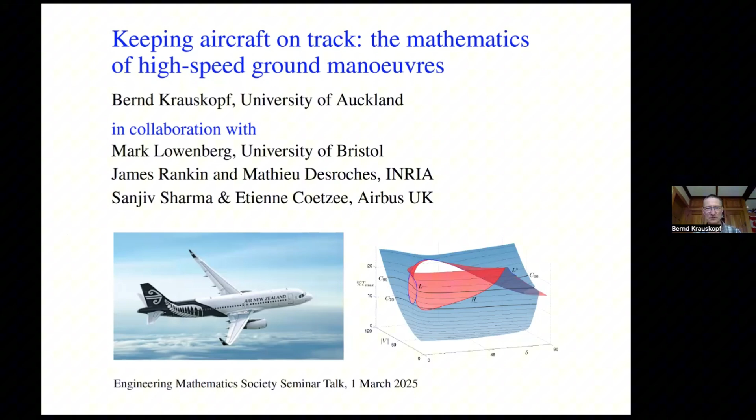You can see a picture of an aircraft at the bottom left, and this is probably how you see aircraft, as flying machines, and that's of course correct. But aircraft also need to maneuver on the ground. And this is the motivation for today's talk.

In fact, in the air, aircraft are all pretty much flying at the same speed—I'm talking about commercial jetliners. Really the money that you can earn is by quick turnaround on the ground. You may have heard of low-cost carriers, and the whole idea is to have the aircraft on the ground as little as possible and just be flying all the time. So that means you have to safely and comfortably for the passengers be able to drive the aircraft as a ground vehicle.

That is driven by, as I mentioned, turnaround time. But the other thing is also automation. You may be interested to hear that the only time you can be sure the pilot is actually actively operating your aircraft is when you are on the ground, because most actual flight operations have been automated. But driving an aircraft on the ground is a lot harder in some sense.

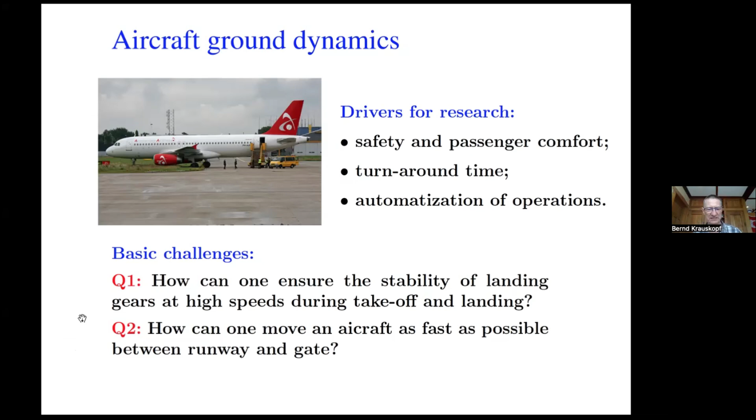But the other question is, how can one move the aircraft as fast as possible between runway and gate? And of course, always subject to safety conditions and passenger comfort and so forth. So this is the second question we'll be talking about today.

Now, to start off with, the landing gear of an aircraft is actually a very nonlinear system. So handling aircraft on the ground is very nonlinear. What do I mean by nonlinear? I mean that if you change some parameter, the reaction of the system is not merely linear—it could be stronger or weaker or whatever. And the reason for this is that you have so-called oleos; these are the shock dampers. They are highly nonlinear, and of course you have damping, compression, friction, saturation.

You cannot damp any load. Then the tires themselves are also really very nonlinear things. Tire dynamics is a complicated field on its own.

And then you have aerodynamics, and you may know this famous formula, 1/2 rho v squared. So the aerodynamics goes up with the square of the velocity. When you go very slowly, that doesn't really play a role. But if you have just landed, there's actually considerable load because of the tail plane of the aircraft. So if you want to turn and you have a tail plane, that tail plane will actively basically object to the aircraft being turned if you're very fast.

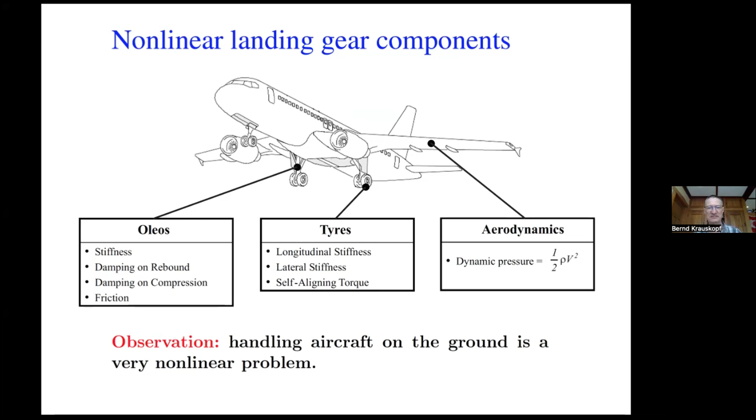So this is a very nonlinear problem, and that's why we approach it with nonlinear methods. So let's have a look.

The question is, how can we move an airplane as fast as possible between runway and gate? I'm concentrating today on high-speed turning maneuvers. You land at the runway, and probably you've all flown, and then the aircraft has to turn off, and there are different kinds of turns, different angles of turning. It could be up to 90 degrees or even 135 degrees, and you want to get off the runway as quickly as possible at still reasonably large speeds. First of all, to evacuate the runway to allow the next plane to use it. And secondly, because you want to use that speed that you already have to get to the gate as quickly as you can. So when we're talking about high-speed turning maneuvers, there's a number of specific questions we can ask.

When is a turn stable? That's obviously really important because when you come off, you don't want to miss an exit or go too fast. If you're driving cars, motorcycles, or other vehicles, you know that one shouldn't go too fast around corners. And what does that mean for an aircraft? Then the other interesting question is, how can a turn actually become unstable? So this is really the question, what are the stability boundaries of high-speed turning maneuvers?

This is, of course, an interesting question. From the applications point of view, you need to know where are the stability boundaries. I'll be showing you some, and we have some techniques to calculate these boundaries directly. And of course, the real fun part is what are the possible dynamics of the aircraft on the ground, including when the turn is no longer stable.

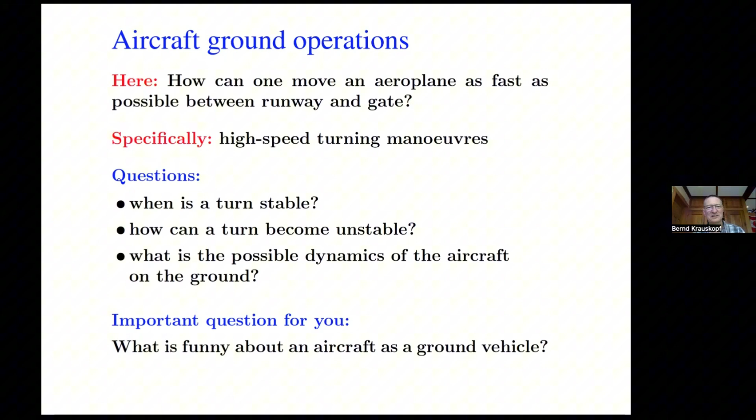What is funny about an aircraft as a ground vehicle? I'm not sure how practical it is over Zoom to have people ask questions or try to answer this question. But if you are brave, you can type in chat and tell me what's probably funny about an aircraft. And I have an aircraft right here. I hope you can see this aircraft. It actually says fun plane, and so this is already funny. This kind of plane looks slightly different from normal planes, but it has an important property. Is anybody brave enough to give me an attempt at answering this question, or you can also speak up on Zoom? Oh, there's a chat.

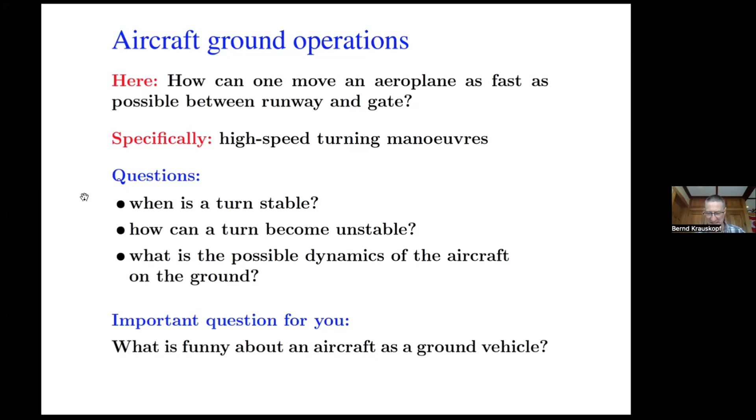Excellent, let's see: the wings. That's, of course, excellent. Yes, you wouldn't build a car with wings. Fuel efficient. No reverse gear. That's also very, very good. Anything else? No traction on the wheels. That's also excellent. Right, so aircraft are really not like cars. Aircraft are supposed to fly. Yes, they have very small wheels. Okay, this is fantastic, I like people getting engaged here. The key thing, though, that I would like to get to, nobody's yet come up with, and that's not a criticism at all, but let's see.

Okay, so actually aircraft, normal aircraft, the smaller types at least, they have a tricycle configuration, right? They have a nose landing gear and they have 2 gears under the wings. Of course, much bigger airplanes have even more wheels, and we studied that too, but the classical mid-sized passenger aircraft has 3 wheels. You probably had this kind of toy when you were younger, or maybe you're still driving around on a trike.

If you go around the corner, you have to be really careful because this could be very tipsy - if you go too fast, you will basically topple over. The key thing is that we have a tricycle configuration of the wheels, with steering only at the front. That's not so dissimilar from a car, but because of that tricycle configuration, you somehow feel that the whole thing is inherently less stable.

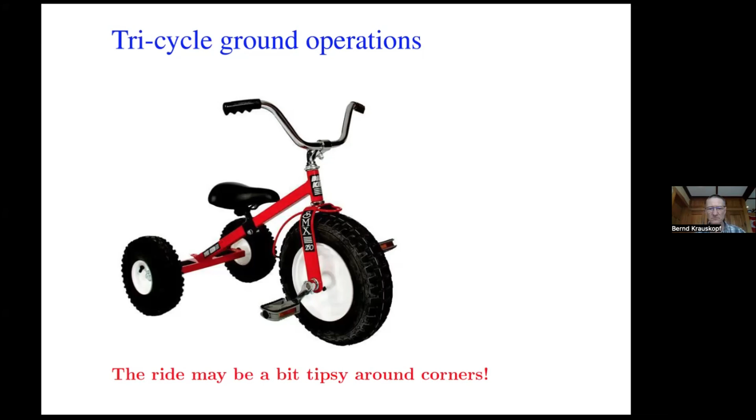Okay, so far so good. Now, how do you study this kind of a system? We work with Airbus, so they have industry-developed models. This particular model is done under SimMechanics, which you may have heard of - this is under MATLAB, and it's a way to have multi-body systems and so forth.

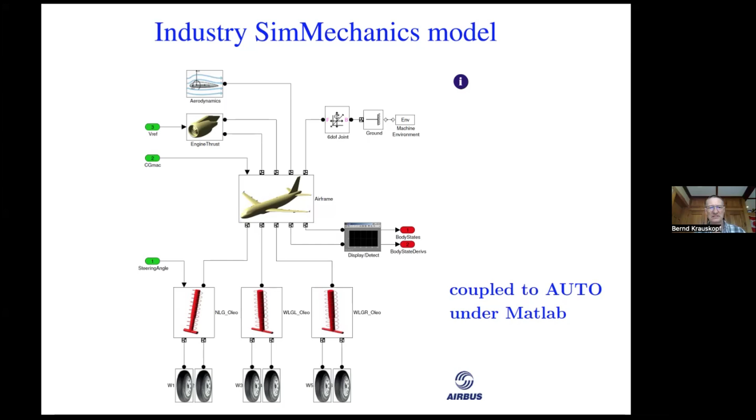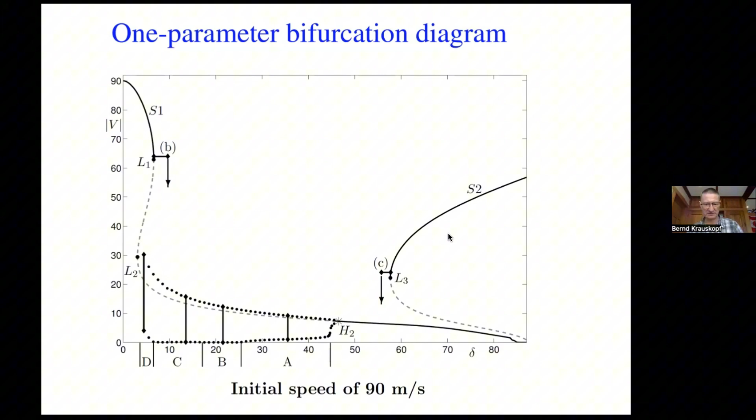This is a video of a landing of an A320 by JetBlue, about 12 years ago. If you look at this picture, I hope everybody can see it.

It turned out that the nose landing gear was stuck at 90 degrees. It's supposed to point in the direction of travel like the other wheels, but it was actually stuck at 90 degrees. So this plane flew around for a while because they noticed this, and they burned off some fuel.

The question is, what should we do? Should we land this plane? There's nothing you can do while this thing is in the air. The nose landing gear was stuck - it didn't retract, it was stuck in this position.

So then the pilot landed, and I'll show you what the landing actually looked like. So this is basically on this branch over here at 90 degrees. So you're not steering, right?

So you're basically using the nose landing gear as just a braking mechanism, if you like. So let's run this video. It's quite amazing.

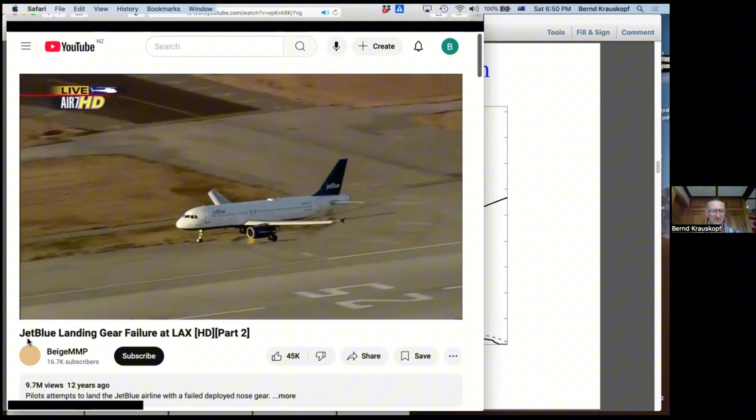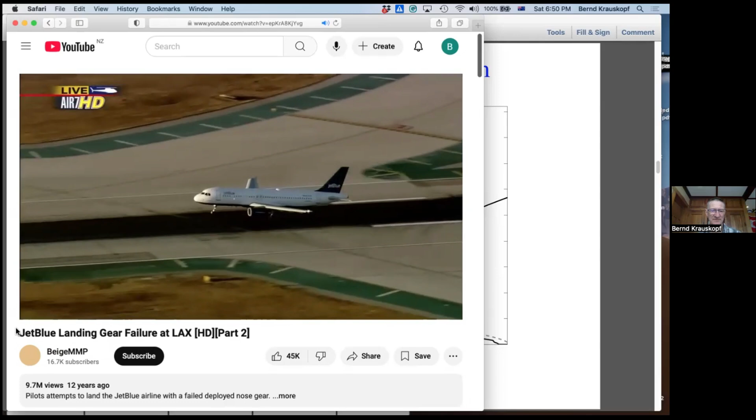So there's the touchdown, but the nose landing gear is still in the air. So they try to slow down, and there it's touching.

Okay, I hope everybody could see this. This is really quite amazing - this is basically landing with a stuck nose landing gear at 90 degrees. What I'm telling you here is, if the pilot would have had the opportunity to actually turn the landing gear a little bit out of the 90 degrees, he could have actually steered the aircraft a little bit.

Now, to understand what's going on, I have to ask whether anybody's ever skied or seen skiing or skating, because if you're on ice skates, say, you go like this, and if you brake, you actually turn your skates 90 degrees.

So this branch, which is really quite surprising, gets picked up by this aircraft model. And absolutely amazingly, there is actually an incident where this has happened. Okay, so now let me continue on.

And so I showed you two examples, right? I showed you this example for 70 meters per second. I showed you this example for 90 meters per second. So this is a one-parameter bifurcation diagram where we plot the total speed of the aircraft as a function of the steering angle.

As we follow the circular solutions that you're getting, some of them are unstable. In this case, a lot of them are unstable.

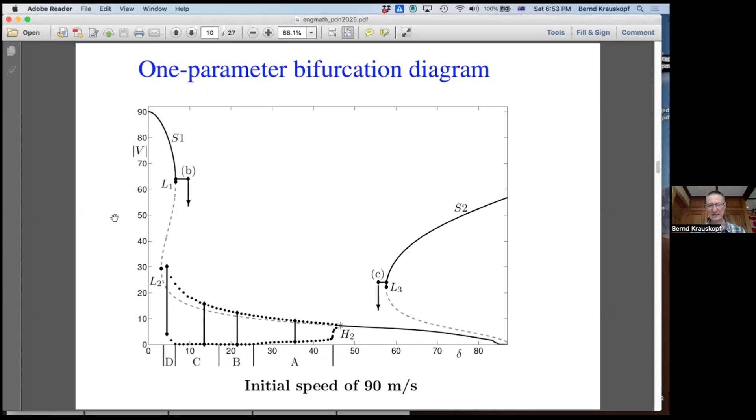Now you can do this for several different initial speeds of the aircraft, and then you get lots of curves and they sort of look different.

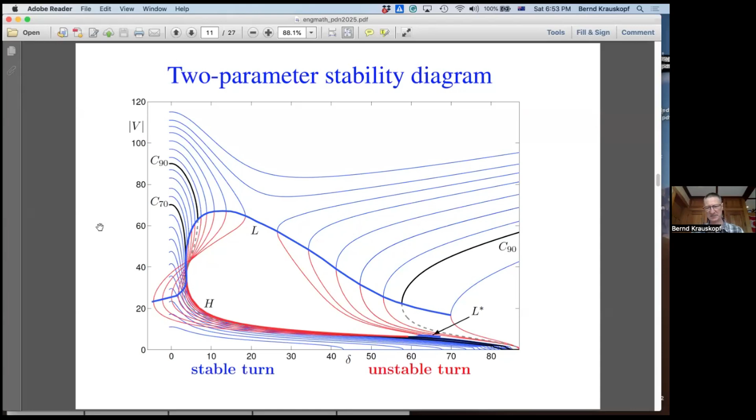And whenever the curve is red here, it's unstable, and whenever it's blue here, it's stable. And it's a bit hard to see what's going on, that's why it's very useful to make a three-dimensional surface out of it.

So both are unstable. The C70 just went through this little red region here where the turning angle is not stable. And the C90 is quite more spectacular.

And here over the side, you have this other branch. You have to be pretty fast in order to get this branch - if you're too slow, you don't have it. So what's the engineering relevance of this plot?

The plot, we can calculate these curves directly, generate the surface. And if you're an engineer or an aircraft designer, you definitely want to be below the red region.

So never go land at more than, say, 60 meters per second and start steering. And of course, for safety, the normal turnoff goes at even slower speeds.

So this is showing how the tools of following stable and unstable turning solutions - you do this in these different slices - you can get what we call a two-parameter bifurcation diagram. It now depends on...

...the turning angle as well as the initial velocity, and this can give you information on how you might design or operate an aircraft.

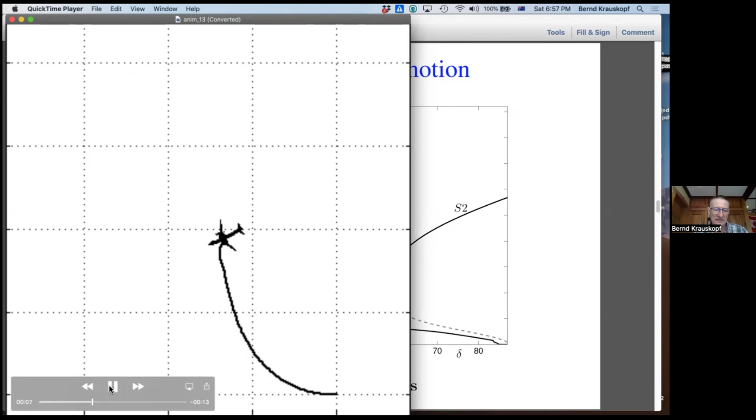So let's watch this one more time. You can see the aircraft turns around a full circle relative to this curve. See, so it's now turning to the right - spinning out of control. Then it keeps going and it goes faster, attempting this turn again. And that's it.

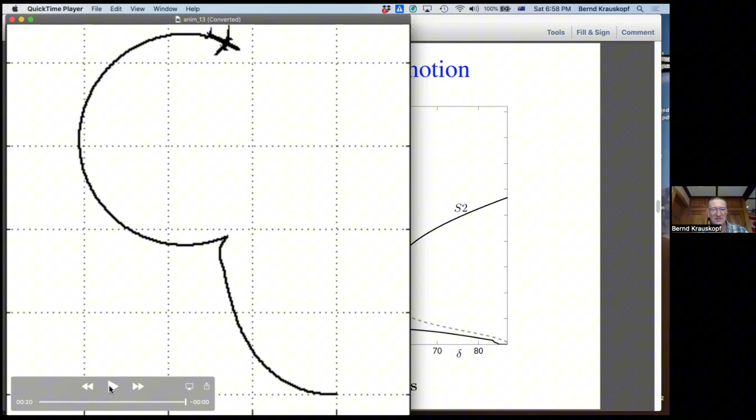So this is what it looks like when you're going around the corner too fast. It's a bit like on a car or motorcycle, more dangerous I suppose. But in a car, if you did this on ice, you'd spin out and also do some sort of a turn relative to the curve you're traveling in.

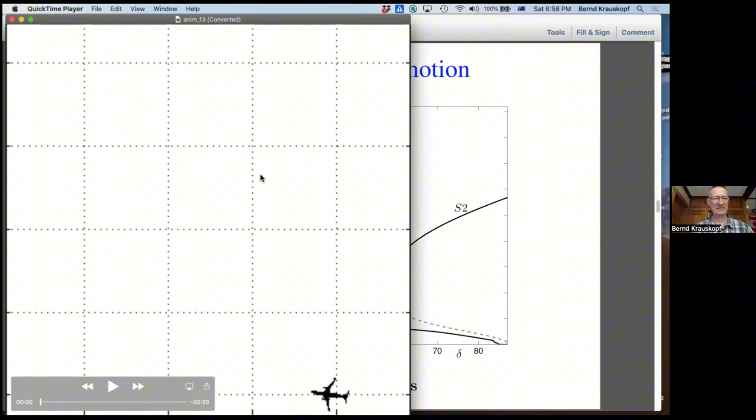Now we had an idea to apply this for practical purposes. Let me see if I can do this here. Okay, so our idea was to have the terminal building over here, and you can see what the idea is. The aircraft comes, and here we go - it parks perfectly at the gate.

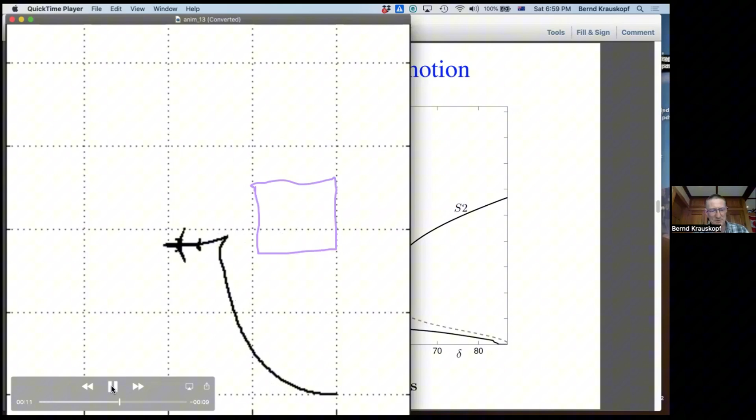So that would be sort of the Blues Brothers approach to parking an aircraft at the gate. I don't know if you've seen the movie Blues Brothers, but they have a funny way of parking their car by sliding it into a parking spot. Now the aircraft comes to a stop, everybody can get off, new passengers get in, and once loaded you just drive off again. It completely takes care of having these machines that push the aircraft forwards and backwards and all the rest of it.

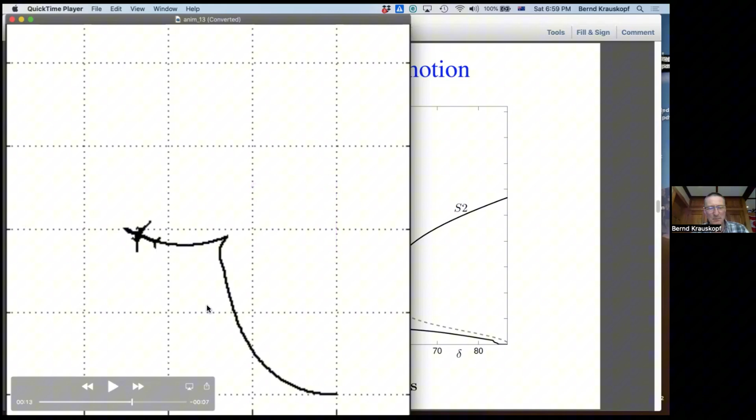You may have already an inkling that our sponsors were not too happy, for safety reasons, to actually operate an aircraft like this. But anyway, this is just a bit of a fun idea - you could in principle park an aircraft at the gate like this. Not to be recommended or tried at home.

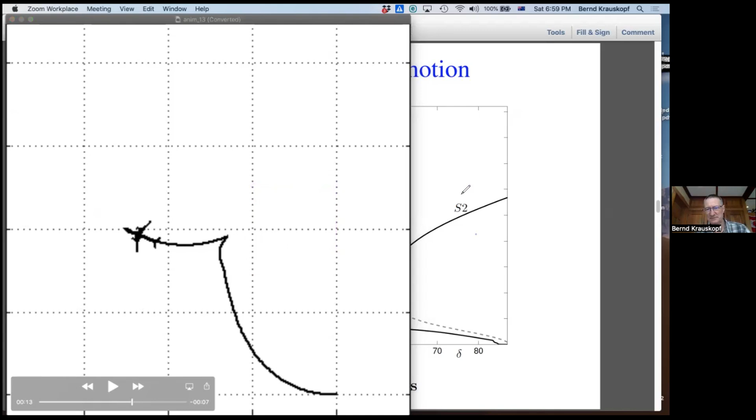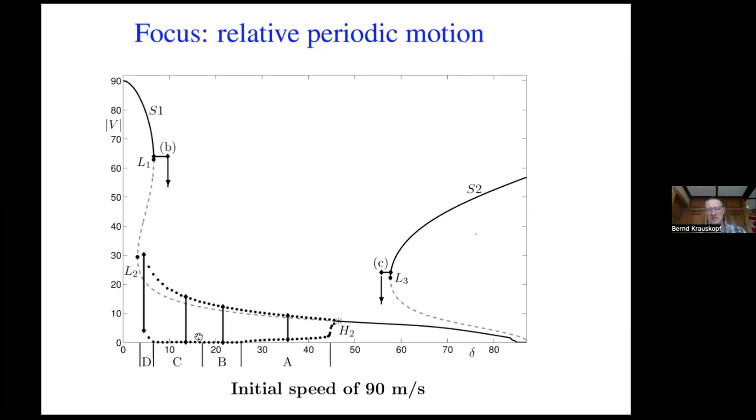All right, so that was fun, but actually we want to do some more serious stuff, and this is what we can do. We can now have a look. If you look at this picture, we have divided this up into several regions, A, B, C, and D, where you find different kinds of properties of this particular turn. So it doesn't always look exactly the same, and we can actually characterize this.

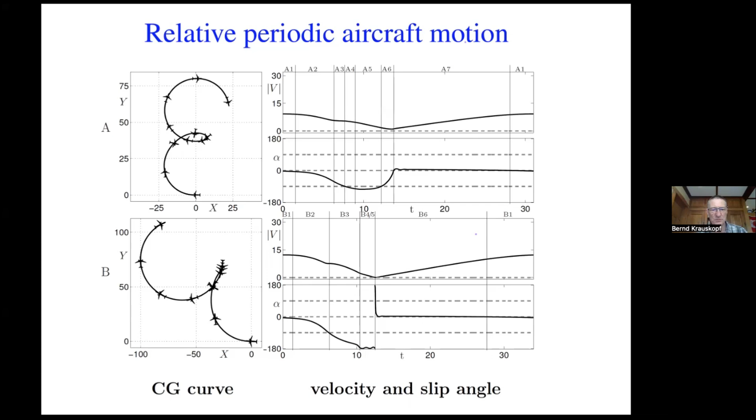And why is this of interest? We can actually, and I've not shown the results here, figure out what is the actual load on the individual tires. So yes, you don't want to go around the corner with an aircraft like this, but even if you don't go around so extremely, from this modeling we can tell you how much forces you have on the tire and how the tires wear out and all that kind of stuff. So you can do quite a detailed analysis of what's happening when you go around the corner, both in the stable regime as well as the unstable regime.

But in order to really understand why the aircraft is sort of spinning out of control if you go around the corner too fast, this SimMechanics model is in some sense not good enough. It's a very big model, it's sort of a black box, it is a single aircraft, some aircraft that was modeled. It's not very flexible. So a project we did with former PhD student James Rankin was actually to develop a completely parameterized aircraft model. The idea is pretty much the same as the sim mechanics model, but now we do modeling from mathematical first principles.

On the left you see these pictures: the aircraft from the side, from the top, from the front. The center of gravity is this point here. So you have a 6-degree of freedom rigid body. We're not assuming any bendiness of the aircraft at this point. We have the engines, there are some points, so the force is attached at the center of the engine somewhere. You can see the landing gear is fully parameterized, where the landing gears are. Also the forces, how heavy the plane is. So this is a 6-degree of freedom rigid body model, fully parameterized.

It works for any 3-post aircraft. We have a ground tire model and we have the aerodynamics. So in some sense, it does what the other model does, but it has lots and lots of parameters. For example, where is this landing gear? How far is the landing gear in this direction? How far is the landing gear in this direction? Here's the CG, and this is the turning point. So they are not the same. Where is the turning point? The point around which you turn the aircraft relative to the center of gravity. Where's the engine thrust applied? So these are now all parameters, and the idea is that this can model any aircraft you like, whether it exists or it doesn't.

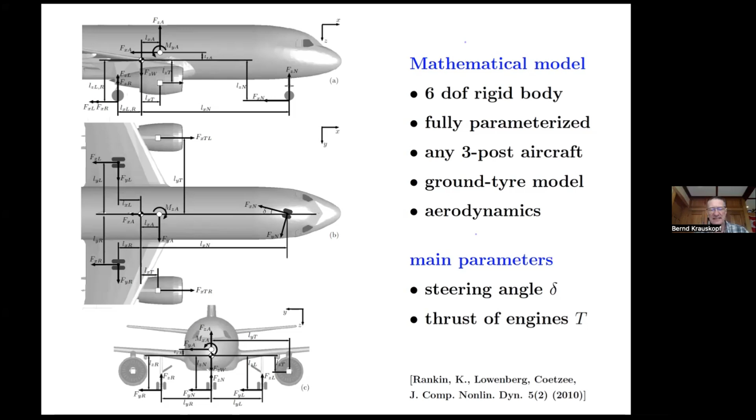So these are called Hopf bifurcations. In the Hopf bifurcation, you actually generate a stable solution—it's basically the undamping of some sort of oscillation. In this case, the aircraft is no longer following the ground trace stably as a curve on the ground, but has a motion relative to the ground trace.

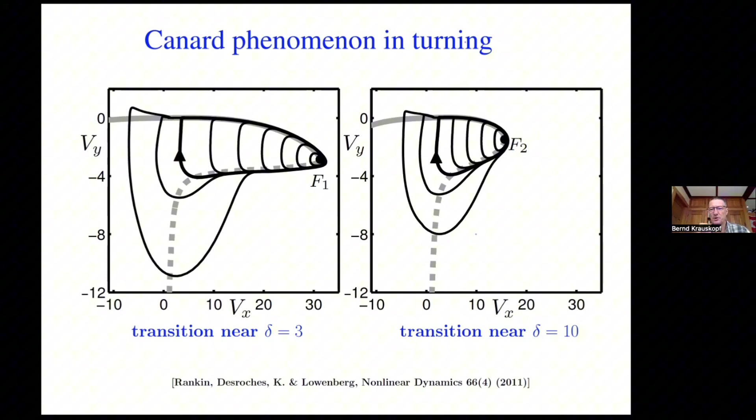This is what's happening near H1 on the left, and this is what's happening near H2 on the right. So this last big circle is what I showed you the video of, effectively. And the key thing is that the mathematical theory tells you that you go from the small onset oscillations, let's say over here, very quickly to this spinning out, which is a slow fast phenomenon.

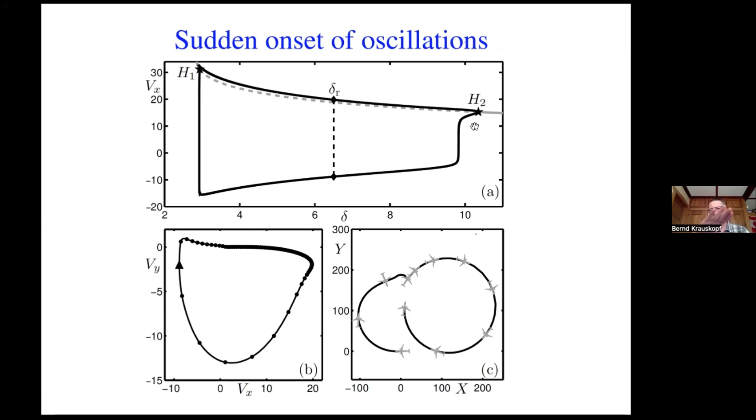So the way to think about it is that the aircraft starts to wiggle a little bit, but then very quickly it spins out. I will summarize this in a moment, but I would like to compare the two vehicles.

I told you it's a trike. So if you want to compare what a trike design aircraft or 3-post aircraft does to an actual trike as a children's toy, I have to tell you that they are really not the same. Okay, there are big differences, and I don't have the time to take audience suggestions of what's different between these vehicles. So let me tell you.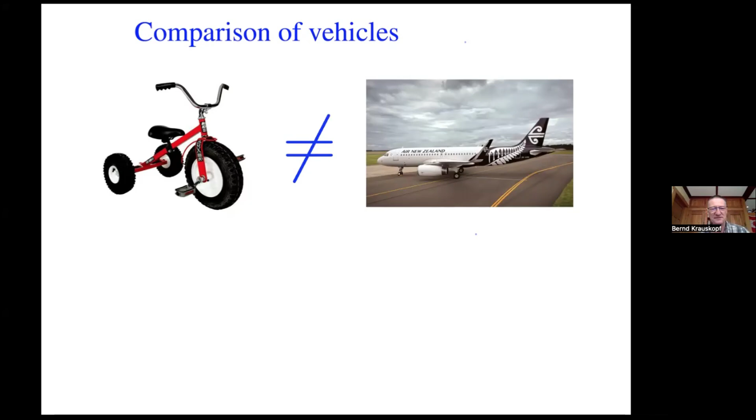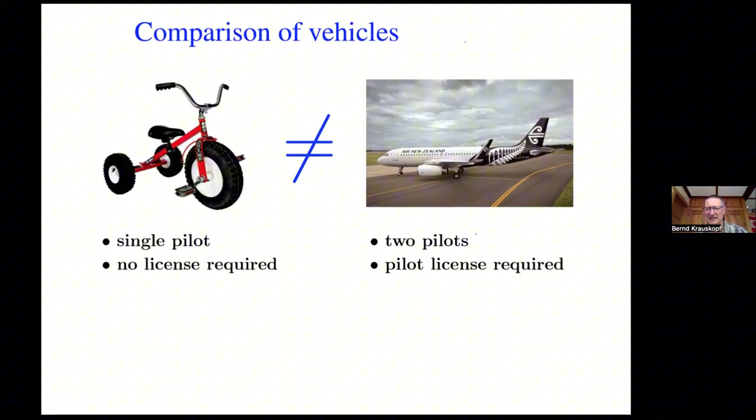First of all, there's a difference in how many pilots you need. You don't need a license for the vehicle on the left, but you definitely need a pilot license, even on the ground. You have no passengers, and you have many passengers on the right, and there's no onboard service if you're going to drive your own trike, and you usually only get coffee, tea, and water on aircraft.

But joking aside, the key thing is the whole analysis I showed you shows that if you have a trike configuration, because the center of gravity is much higher, the trike will actually topple over. So in principle, all the dynamics I showed you, you could also do on the trike on the left, but you cannot do it if you do it sort of on normal ground.

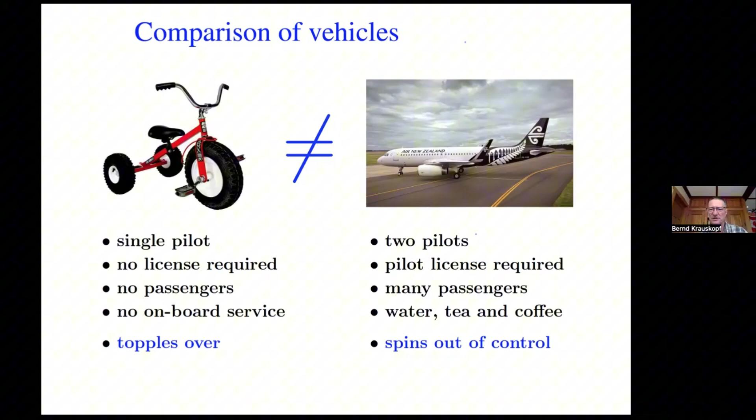Maybe on ice, you can start spinning out with it. Okay, so an aircraft, even though it also has a trike configuration, because of where the engines are and how it's set out, it is a much more stable thing in terms of the toppling effect. So aircraft don't really ever topple. You might think if this thing goes around the corner too fast and starts toppling, the engine will probably hit the ground because it's only about a meter up from the ground. This is actually not happening. You will not be able to topple the aircraft so that the engine hits the ground if you go around the corner too fast. It will spin out of control in the way I showed you.

So let me wrap up here. I showed you constant radius turning for an industry tested aircraft model, and the loss of stability is due to the onset of oscillations. This phenomenon, which we call the Canard phenomenon or Canard explosion, a pretty dramatic term, is only a mathematical term, rest assured, giving you this stability boundary.

So what really is happening physically, when you go around too fast, you have two tires - one on the outside, one on the inside. Even in a car, you will tilt a little bit to the outside because of centrifugal forces, so you have more force on the outside wheel than on the inside wheel. But both wheels are actually required to hold you in place and complete the turn and be stable. After this Hopf bifurcation, the wheel on the inside starts slipping a bit, so you start to wiggle out, but the wheel on the outside is still able to hold the aircraft, so it stabilizes it. It doesn't really spin out of control.

Then the other wheel catches again, and you sort of wiggle back and forth a little bit, sort of like a bee in a wiggle dance. However, very quickly afterwards, when you saturate the first tire and it starts slipping, the outside tire has a bit more force on it, so it's not quite slipping. But if you go ever so slightly faster, the outside tire will also slip, and then there's nothing holding the aircraft, and you start spinning. That's basically the physics behind what mathematically is called the Canard explosion.

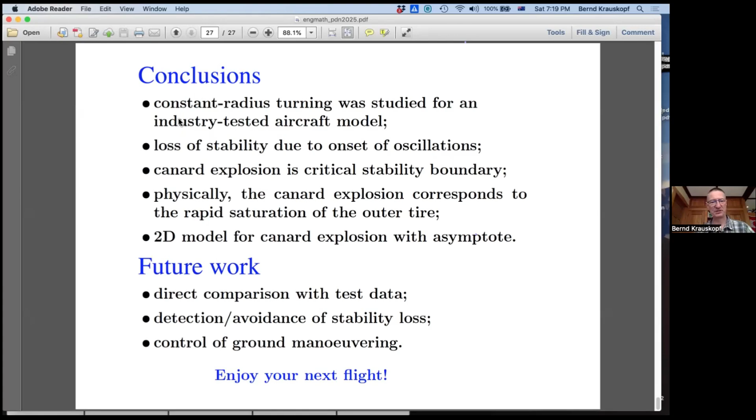This is done with advanced numerical techniques. The equations are so complicated that, in principle, you could calculate this relative equilibrium and when you have a Hopf bifurcation, but it's just not particularly practical. There's good software that does it basically just as well as you would by hand.

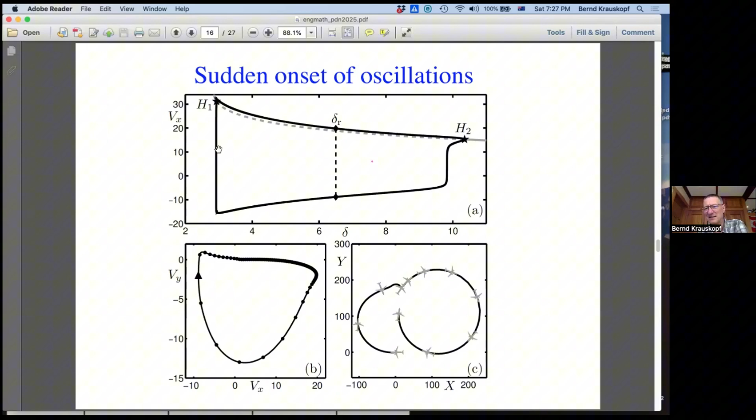So it's a subtle thing, but that's why we actually developed the other model - because then we have actual equations for the whole thing, and we can follow the periodic solutions and resolve this even when it is extremely fast. The reason is that we are computing step size in the product space of parameter and solution. I've shown you this picture - these solutions change a lot, but this all happens along this vertical line. Because the step size is also determined by the size of the solution, the continuation of the periodic orbit is actually able to resolve this. I hope this wasn't too technical for the other listeners, but basically the techniques we're using are able to deal with these slow-fast things, even if it sounds reasonably extreme.

Okay, there's more questions in the chat. Let's see, add an extra wheel. Okay, so why don't we add an extra wheel?

So there are aircraft that have a lot of extra wheels, like the 747, the A380 actually has 4 posts, but it's all to take the weight. Even the biggest plane, they only steer with the nose landing gear.

And why is a car more stable? Because it's square, right? It's much more stable to have a wheel here and a wheel here as you go around the corner. But how are you going to attach this to an aircraft? You really don't want to have a hammerhead kind of nose, that would not be very good from an aerodynamics perspective. We should never forget that planes are really designed to fly, and so they make the best of that.

And the trike configuration with only the nose gear steered is basically the way to go. If you're building a ground vehicle, don't build it like an aircraft. That's basically the punchline.

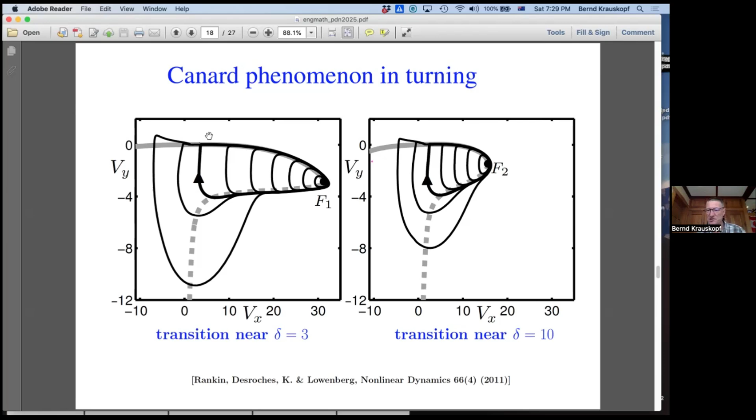Okay, thanks, engineer. Wheel placement is closer to the engines, yes, varying the height, yes. So this has all been investigated. Where you place the wheels depends, of course, on the weight distribution of the aircraft, where the engines are, and so forth. And that's actually the usefulness of a model like this one, where you are actually able to play around with these parameters.

Okay, you can test your aircraft. You go around the corner, and maybe it's a bit unstable or it spins too fast. Move the wheels further out. In principle, in a trike, if the wheels are further out, that's better.

But of course, the issue is also that then the wings have to take the full weight of the aircraft, right? For example, there are some smaller type aircraft that have a trike configuration and the wheels are actually attached to the main fuselage, not to the wings. They actually have to strengthen the wings quite a lot to have the main gear attached to the wings because it has to take all the weight when you're landing, okay?

And of course, on the ground too, but sometimes you have a heavy landing and it has to take more than just the weight of the aircraft when you have a heavy landing.

So the oleos is also a good one. You don't want to have too much oleo, too much compression, because you have to maintain the distance of the engines from the ground, for example. So there are also limits of what you can do there. You don't want them to be too soft because then you wiggle around corners.

You may know that some older cars with soft springs, they are not so comfortable going around corners. So sports cars tend to have stiffer springs because then you can corner better. But of course, that takes away passenger comfort, right?

You could, in principle, have a landing gear with basically no shock dampers, but that would be a very rough ride. So these are all these kinds of compromises that people have to make when they design where to place the wheels on a commercial airliner. So again, if you're into ground vehicle design and you optimize all kinds of things, the vehicle that you would be designing would be very unlikely to look like an aircraft in the end.

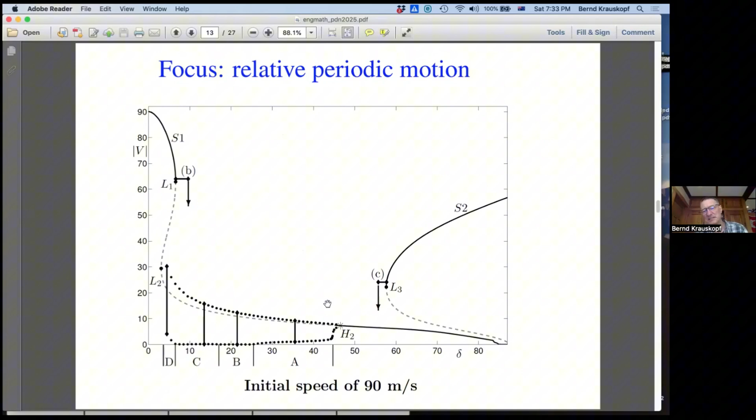But if you really want to see what's going on, you have to go to the trouble and develop this model properly. So to answer your question, James Rankin put this together. It's a non-trivial exercise - you know in principle how to do it, you have Newton's laws and all the rest of it, you have to parameterize everything.

You just have to be very careful. It's about force balance and so forth, you have to have a tire model - we used an established tire model, so we didn't really model the tire here, there are tire models you can use. Basically, it's a big bookkeeping exercise to make sure the whole thing works.

Then you need to test it and make sure that if you take the same parameters that represent an A320, you get the same results as with the SimMechanics model. The problem is you want an industry-validated model - anybody can make a model, but you don't really know whether it's correct. We were lucky that we could compare it with the industry-tested models.

So that whole process of writing down the equations and checking them - in principle it's not a hard exercise, there's a very systematic way of going about it. You take your rigid body, then you have interactions with the ground, the forces, the center of gravity - it's just a lot of parameters and some reasonably long equations.

You can't make a plus-minus sign error. You have to be really careful, but you need to be able to compare it to something which you know is correct. That's actually the biggest problem in this kind of modeling, and we were lucky to do this.

In fact, this also took about half a year. Model development, writing down the equations, is one thing, but making sure it actually checks out is what takes the time. It's like when you write a program - writing it is sort of fast, but debugging it and making sure it actually works, that's where the time investment is.